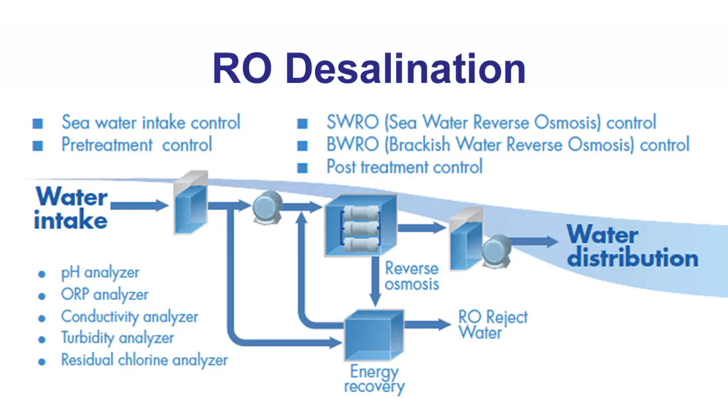In the past few decades, several techniques were presented as alternative technologies to secure fresh water. One of these techniques is desalination. Desalination of seawater proved to be an effective but expensive method to get fresh water from seawater due to the high power consumption or demand of this technology because of the presence of membranes that separate the salt from the seawater.

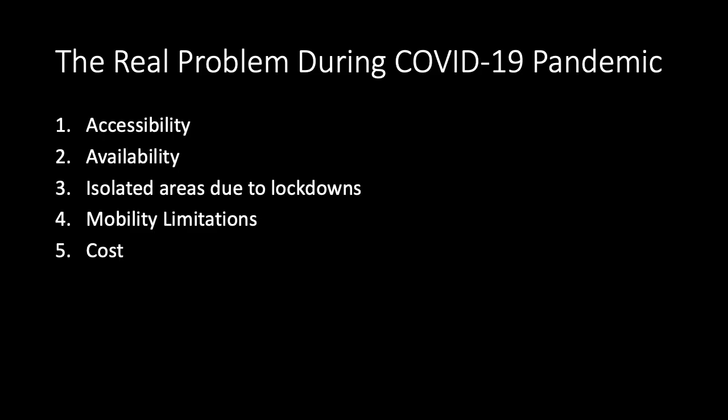Now, we can summarize the effect of the COVID-19 pandemic on freshwater production or freshwater accessibility by points. First, as we said, accessibility. Second, availability. Third, isolated areas due to lockdowns. Fourth, mobility limitations and costs. All these highly affect the availability of fresh water for individuals.

We started thinking out of the box, and our group found that thinking out of the box doesn't mean we go for bigger facilities. Actually, we went the other way. We will go small, and not only small, we will go micro. And this is why we created our chip, a microfluidic chip, for desalination of seawater and for purification. In this chip, we have 2 sections: the first section for water desalination and the second section for water purification.

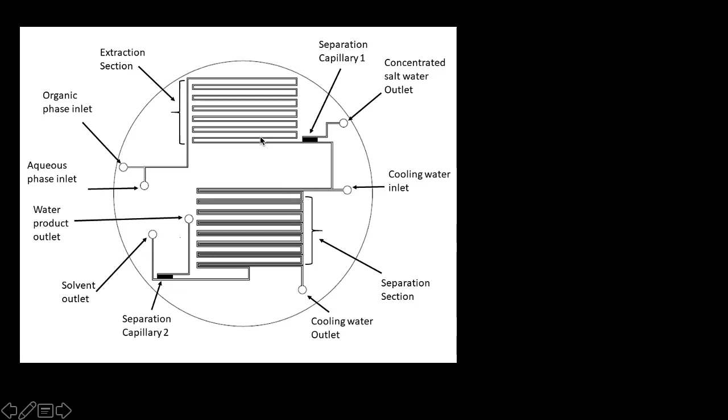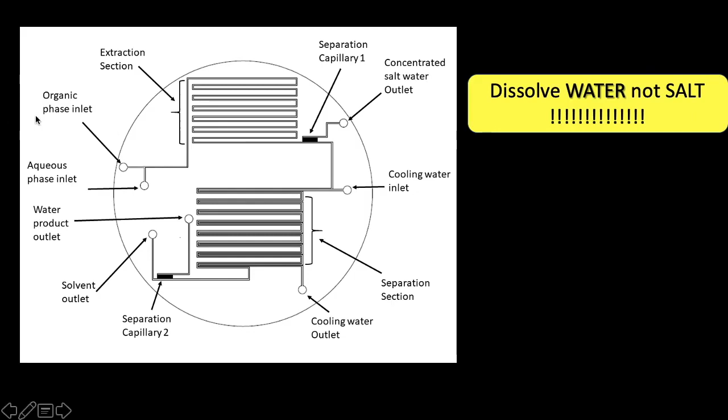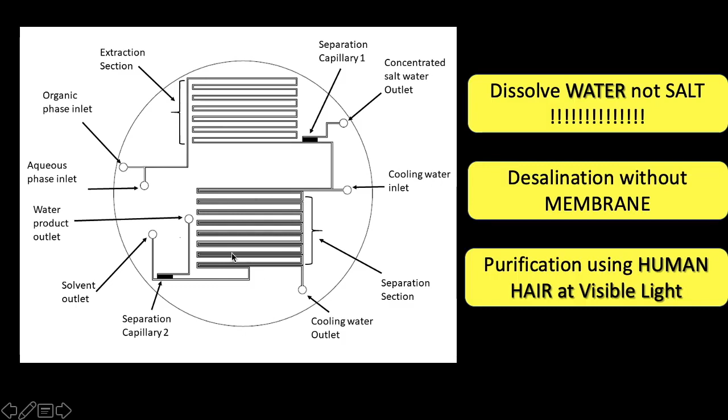Here, the first novelty is that we are dissolving water. We are not dissolving salt. We are dissolving water, using an organic phase, a food grade organic phase. Second, we don't use a membrane. Desalination without membrane means the power consumption is very low. The third one, purification using human hair and visible light. This is the third novel point, where we have taken human hair, treated it and inserted it in the second section, so it will start working for purification with visible light.

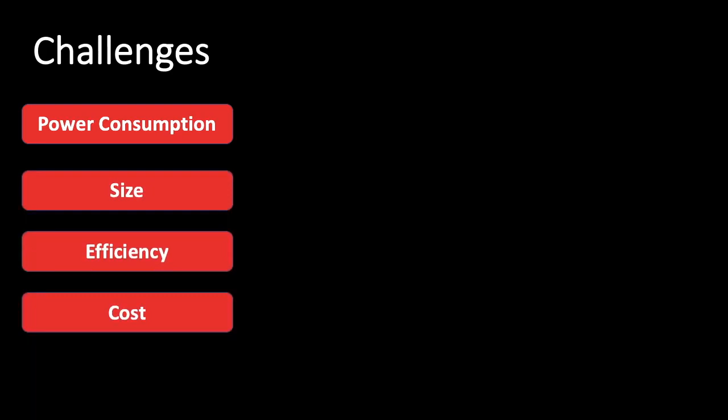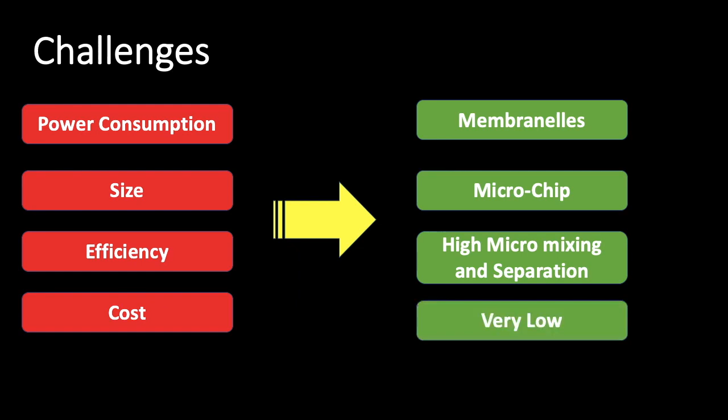So the challenges we faced are power consumption, size, efficiency, cost. And how did we solve them? The power consumption by removing the membrane. So we have invented a new technology that does not use a membrane. The size was the micro size. We have microchips. You can handle it and carry it in your pocket. The efficiency: the micro mixing and micro separation in the microfluidic chip can give you a huge mass transfer area for maximum efficiency, and the cost is very low because the fabrication cost of the microchip is very low.

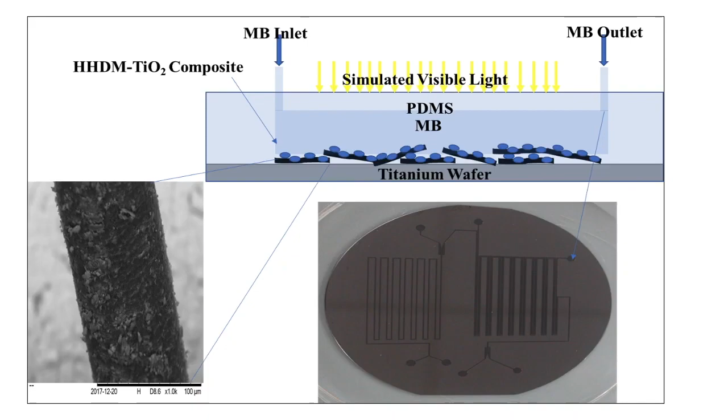This is the human hair part, where you can see the human hair before treatment and after treatment, where we created a hollow fiber from it, and we use the melanin layer surrounding human hair as a base to be a catalyst that can work in visible light. Most of the catalysts for water treatment work in UV light, so that is an additional novel point, that it works in visible light.

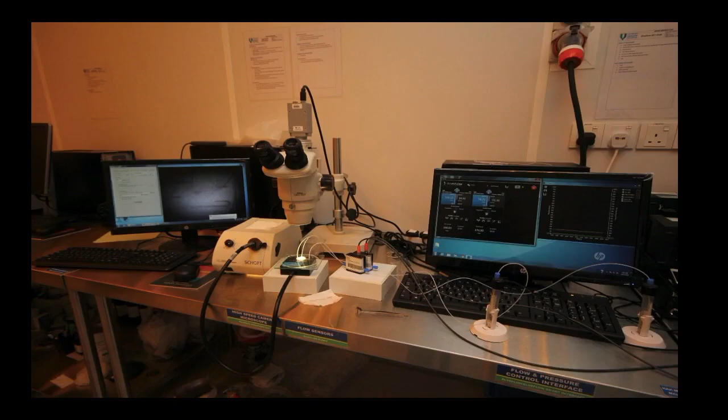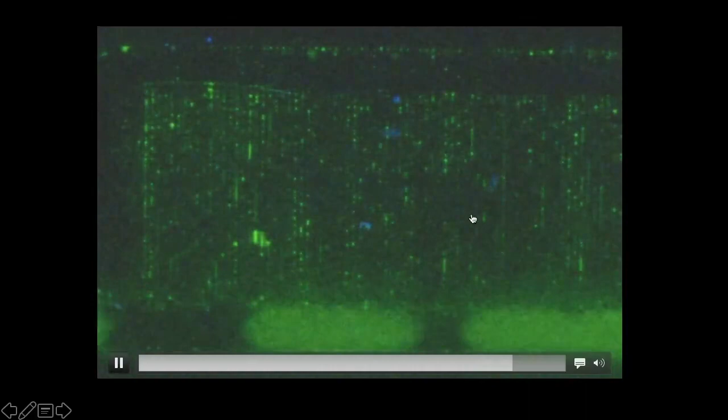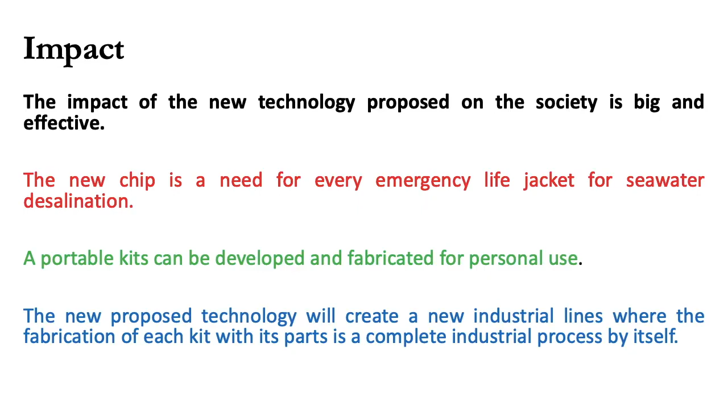So the impact, we have three major impacts. First, the new chip is a need for every emergency life jacket. The portable kit can be developed and fabricated for personal use, and this is the main target, that every person can have his own desalination kit. The new proposed technology will create a new industrial line where the fabrication of each kit with its parts is a complete industrial process by itself. So we are creating a new industry line.

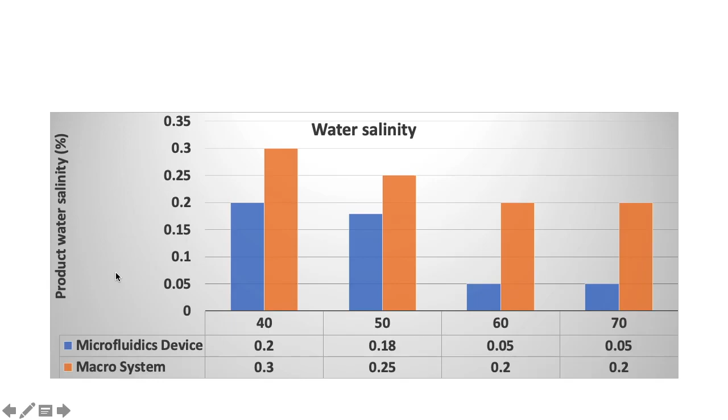These are some of the results where you can see that using our microchip can reduce the water salinity down to 0.05%, which is very low. We have published our work in high-profile journals like Scientific Reports by Nature and Chemical Engineering and Technology in Wiley.